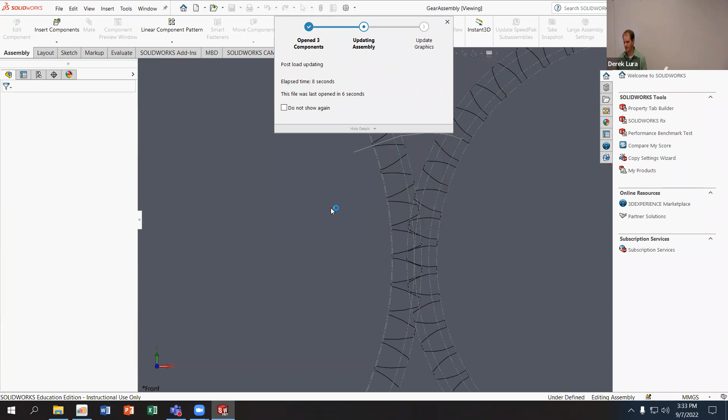Inside here, you can follow along if you want. I'm not going to be collecting this file as part of the week's progress submissions. I'm going to open the gear assembly. I made a much larger tooth profile on this one, but it's derived from a very similar set to the one we did in class earlier. The biggest difference is that this one has a much larger dedendum, a larger pitch, and the base circle is appropriate for both of these gear sets.

I probably need to rebuild this to size it appropriately, so I'm just going to hit rebuild at the top of the screen. You can see these are the contact circles, and they're touching there. Right now I have a gear mate based off the size of the contact circles, and since we're rounding on this one, it doesn't work out exactly right, but you can see the gears are moving reasonably well.

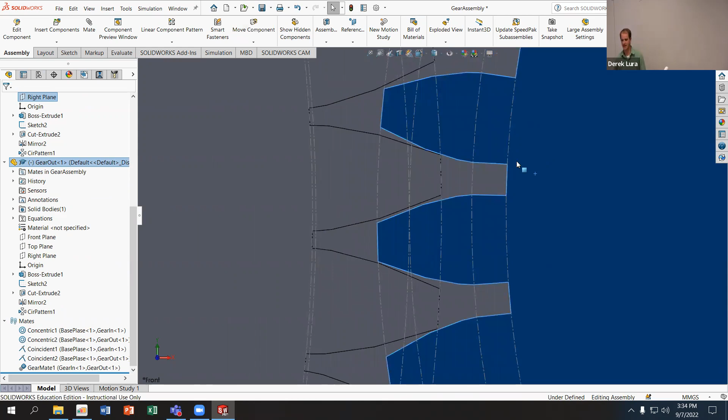What I want to show you here is that I can actually have SOLIDWORKS calculate the motions based off the contacts using the move options with physical dynamics turned on inside SOLIDWORKS.

To do that, all I need to do is first make sure that I don't have any intersecting geometry inside the assembly. Generally, when starting off doing any kind of motion analysis, either using the mates or using a motion study, you want to make sure you don't have any interferences in the assembly. So that's the first thing I'm going to check.

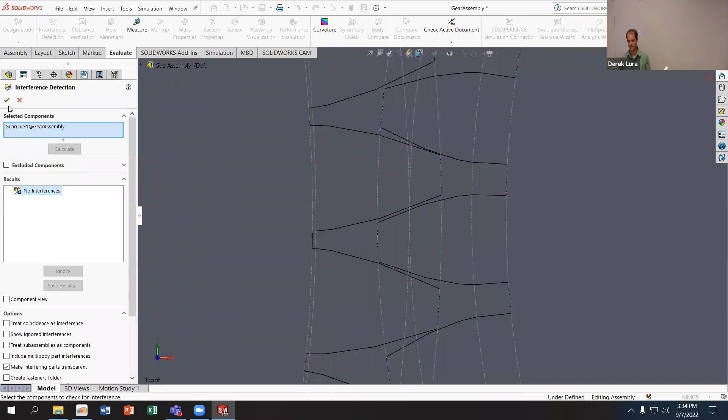I'm going to go into evaluate, interference detection, click calculate - no interferences, then I'm good. I can make this have some interferences if I drag this down so the gears are not meshing, and check for interferences.

It will show you where the interferences are and how big they are. But if you have any interferences in your assembly, then most of the things we're going to talk about today will not work. I'm going to pause for a few seconds to see if any of you have questions on the interference thing.

They can fit perfectly, so you don't have to have clearances per se - you just can't have any overlapping geometries. I'm going to roll this back so my gears are not interfering with each other, then do the interference detection one more time just to make sure I got no interferences.

Then what I'm going to do is actually turn off this gear mate, so I'm going to suppress it. Now the gears will move independent of each other.

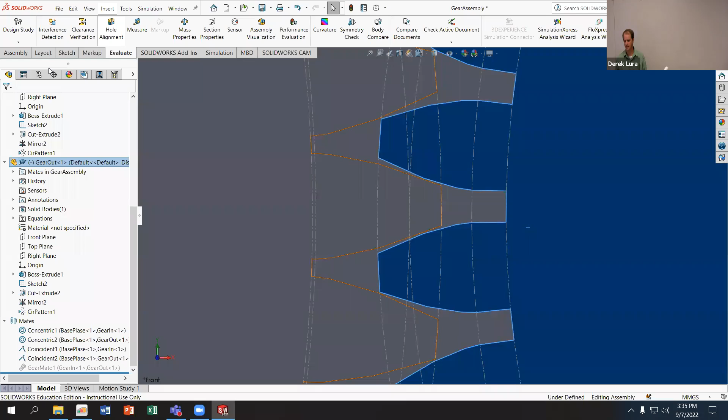What I can do is go into my assembly options, and rather than just dragging with the mouse, I click on this move component option. Then on the left here you see these options for standard drag, collision detection, and physical dynamics.

If you want parts to move as a result of a collision, then you want to turn on this physical dynamics. So if I turn this on and then drag the gear, you'll notice the other gear moves as a result of the collision.

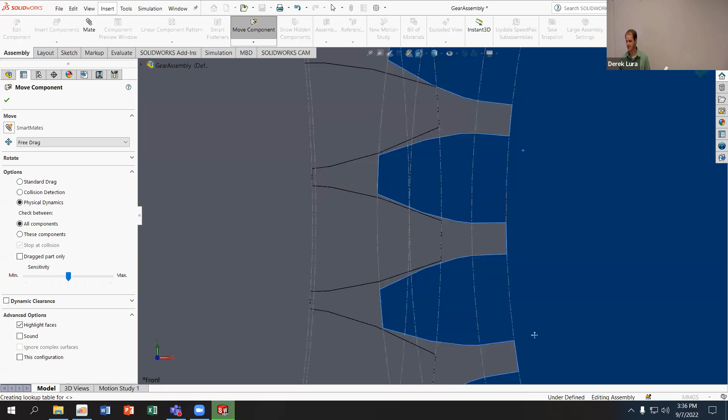I can actually use this to see the contact point shift over time on my gear set. You can kind of see the contact roll along this. Now this looks like a series of segments on the display just because of the way it's rendering the curve - it's not showing the fully rendered curve profile as driven by the equations in the gear. When it tries to render a circle, it doesn't actually render a circle, it renders a series of lines. So it doesn't line up exactly perfect here, but you can kind of see the transitions as it goes across. I'm always catching a new tooth at the top and then releasing the last tooth at the bottom.

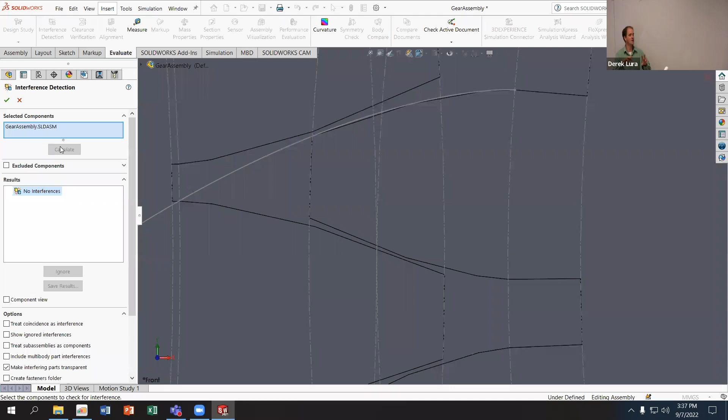It doesn't matter what I do here as I roll it around - if I ever come back into evaluate and do interference detection, I'm going to get no interferences. Because what it's doing is looking for whenever there's an overlap, and if there's an overlap, it pushes that next component out of the way in whatever direction it's allowed to rotate. You get the same options in the rotate options.

So if I go to move, rotate - I'll wait for SOLIDWORKS to respond.

Hopefully it's not crashed. But it's the same exact components that we have here. We can go to physical dynamics and we can rotate. Oh, I must have accidentally moved it while I was calculating or something.

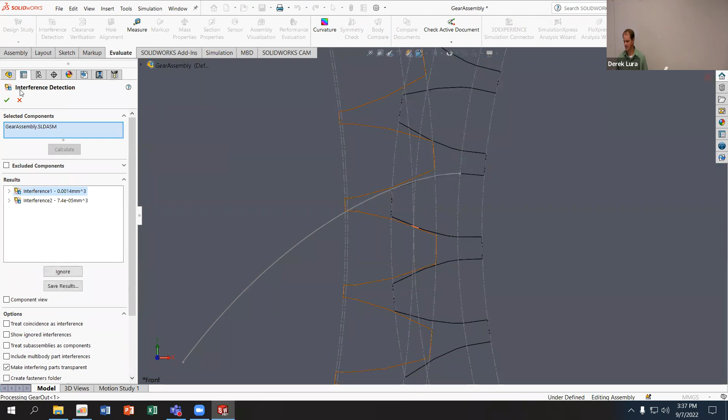Let me evaluate interference detection. I must have just accidentally clicked it while it was frozen. Should I adjust it a little bit? No, so close. I don't have a whole lot of clearance in here. No, look at that bad position.

I'm not going to do this one more time. You guys already saw it work. All right, I got it to work. I moved my gears, they're not on the right spot anymore, but you get the idea.

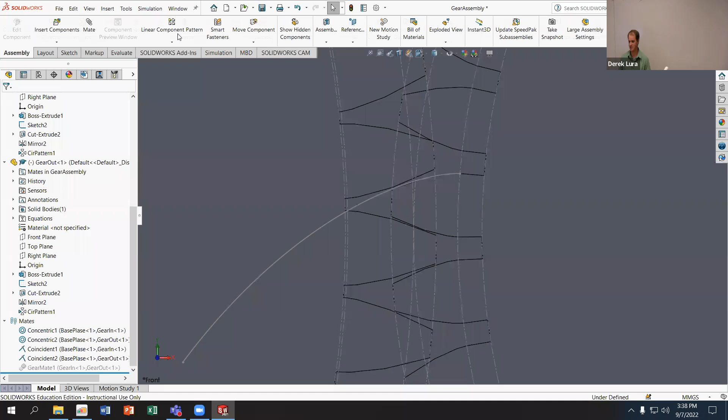As long as I'm able to set up the assembly so that I'm not starting in an overlapping condition, and I have things that will move appropriately based off collisions between objects, you don't have to specify the mates. You just have to go into the move options here and specify you want the specific type of collision. You can also look at the conventional collision detection. This is helpful for figuring out where the limits of things are.

So I can drag things around and it'll stop when it hits a collision, if I can get it to start in a non-colliding state. See if I get... oh, I've got to turn my collision on.

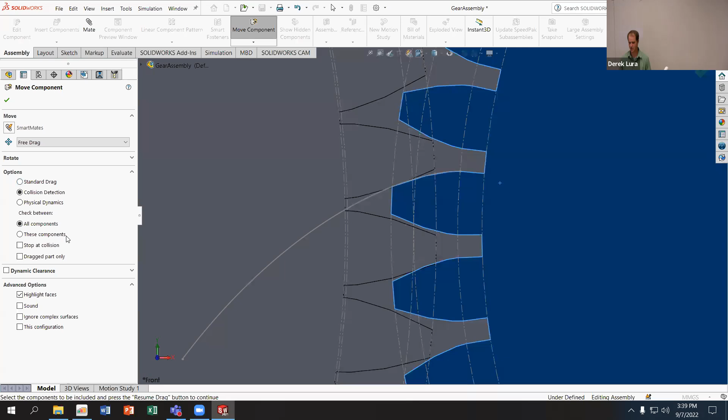It's ignoring these ones because it's already collided with those faces. So you can see all the faces that are lighting up -- those are the ones that it's colliding with. There we go, now I'm not colliding.

Stop at collision and make a sound. Bonk. And one of the things that's interesting there is you'll note that it actually collided on these faces at the same time, because this gear is really set up as an involute gear, and so it's able to maintain contact across multiple teeth at the same time, which is good.

There is kind of a boundary on this in terms of what amount of overlap is considered to be a collision versus not a collision, which you can adjust on these sliders -- that's the sensitivity setting. I wouldn't adjust that too much. If you make it too far towards max or too far towards min, either it takes a really long time for it to run, or it starts ignoring things. But you can adjust it in small amounts if you find you need a little bit tighter control on your sizes, or it's being too sensitive and not letting you do what you need.

And you can also isolate and only look for collisions on parts that you're touching, as opposed to all the parts, if you want to look at downstream or not-downstream effects.

Any questions on doing the collision detection or the physical dynamics using the move options in an assembly? I hear a ding, which is good -- you guys are playing with the collision detection.

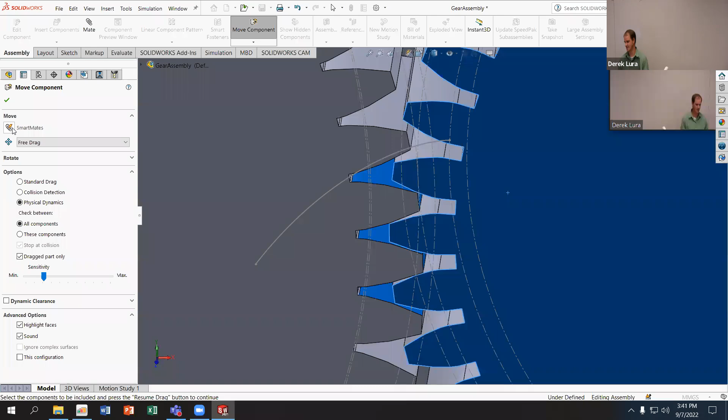Right, next thing we're going to do is build out an assembly. I want to show you some assembly features you may or may not have seen in the past. And then I'll show you how we can actually move a fairly complicated set of parts in very specific ways using just mates. After that, we'll look at doing some motion analysis -- hopefully we'll have time to do that in some level of detail.

So go ahead and close out the gear assembly if you haven't already done that. I don't need to save it. I'm going to do a new assembly. I'm actually going to work in inch pound second, but I do want to work from my base.

These are all from the robot.zip file on Canvas. So I'm going to open my base, click on the green check mark, and change this from MMGS to IPS. I'm just going to flip it so it's not upside down.

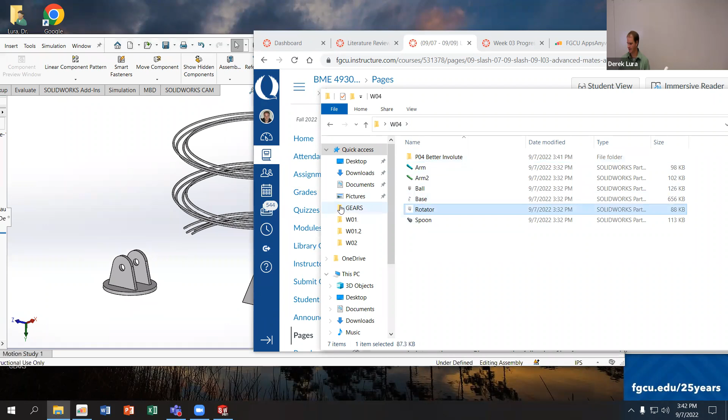Yeah, I made it inch pound second -- I made all the robot parts in inch pound second. Once I've got that first part in, I'm just going to drag in the rest of my parts. So I'm going to go into the uncompressed folder here for week 4, and I'm just going to drag in the rotator, arm 2, spoon, and ball.

Those are all my parts. So once I've got that, I'll minimize that and maximize my screen.

The first mate I'm going to use is actually a hinge mate. The hinge mate is just like using a concentric and a coincident mate, except it combines them into one utility, which can make your model tree more concise.

So if you go into mate... actually, does someone need a few more seconds to get these parts loaded in?

So what we're gonna do is build out a little robot arm here. It's only got a few components. It's gonna have a set of degrees of freedom, and we'll have the robot move along the path I've specified inside this base after we have it. And if we have time, we'll also have it go and drop a ball onto this rolling track, pick it up off the bottom, bring it back up and drop it. I don't know if we'll get all the way through that, but hopefully we'll get most of the way through it.

So far, so good. Who still needs time to get the robot parts loaded into an assembly? One, two. Anyone have any questions while we're waiting for them to get stuff loaded? Marza?

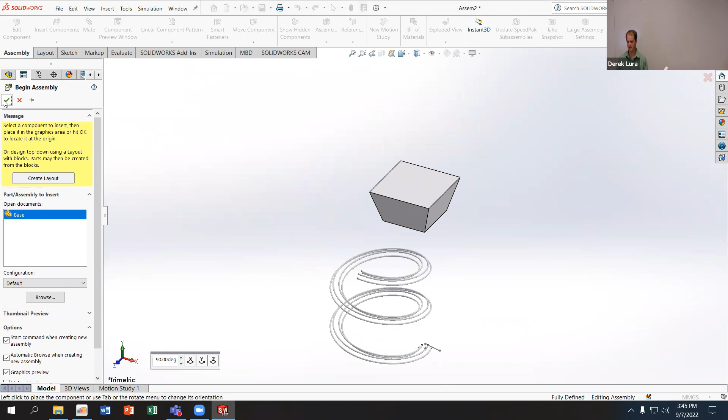Let's start over. I'm just going into a new assembly. For the first part in the assembly, I want to click on the base, click open. I don't want to click on the workspace because I really just want to make sure that thing starts off with the origins aligned.

Most of the time, if you're working on a CSWA or CSWP style question, you're going to want to have some base component or starting component that has the front right top planes of the assembly align with the front right top planes of the part, and that will do that.

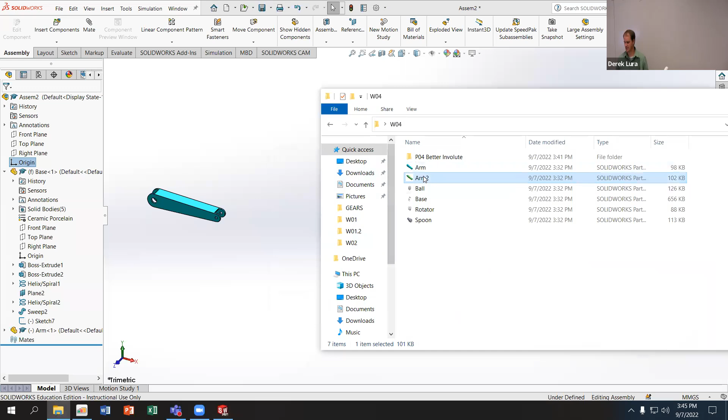And then the rest of them, since I'm going to position them using mates, I don't really care where they are, so I'm just going to drag them in. You can drag in multiple parts at the same time, so I can drag in all four of those at once. I don't typically do that because sometimes that makes SOLIDWORKS crash, and I'm just being conservative.

All right, now I'm going to start adding my mates to position these. Again, I'm going to start with my hinge mate, which you may or may not have used. Most of the mates in SOLIDWORKS, if you read what it's asking for, you can figure out what you need to do to make that mate.

So I want a hinge, which is in my mechanical mates. You see it's right here, it says hinge. So I'm in the mate tool, in mechanical, click on hinge.

It says, what are the concentric selections? So I want this hole to be concentric with this hole. What are the coincident selections? I want the bottom of the rotator to be coincident with the top of my base.

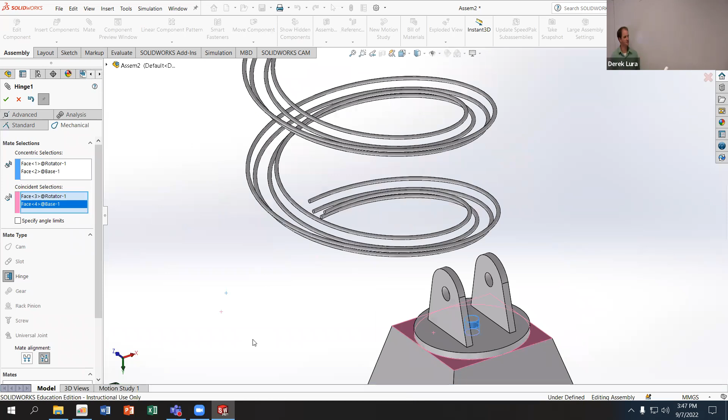Again, pretty simple set of mates, right? I hope. And not that hard to interpret based off what I was given. The advantage there is I've added what is equivalent to a coincident mate and a concentric mate without having to go through and do an extra click. So this is really all about saving you time when making assemblies.

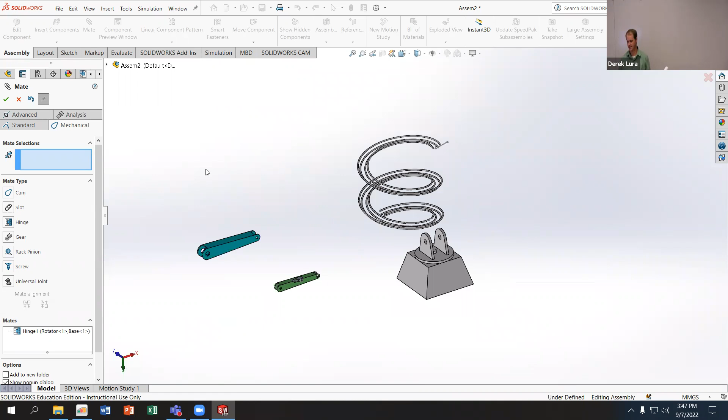Another really helpful mate is the concentric mate, which I can click on this face and this face to get the concentric mate. I'll go into my standards. Wait for SOLIDWORKS to respond.

I need a new computer for up here. Or maybe not, it slows me down - makes it easy for you guys to keep up.

And then click on concentric. I want you guys to also realize that I can click on the faces and then the mate, or I can click on the mate and then the faces. The order is up to me. Most of the time, if you know what kind of mate you want to add, it will restrict your selections based off of what you click. So a lot of times it's good to click the mate first.

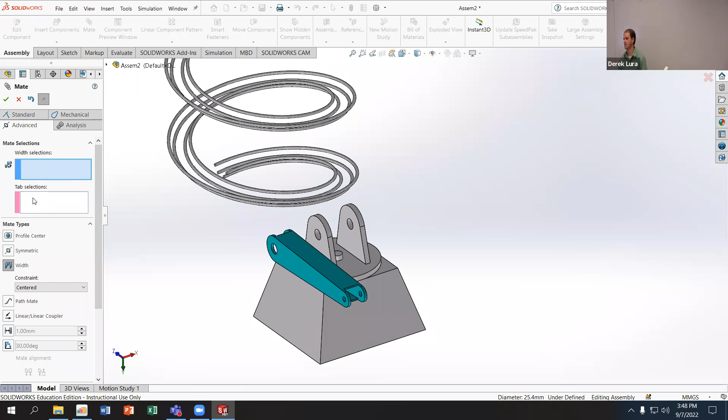Another mate that I like to use a lot is the width mate. This prompts me to click the width selections and the tab selections, and right now it doesn't matter which one is which. So if I click on these two surfaces as my width and these two surfaces as my tab, it's going to center that part. If I flop those and select these two surfaces as my width and these two surfaces as my tab, it does the exact same thing.

So don't worry about which one is the tab and which one is the width. Two sides of one object, two sides of another object gives you what you need.

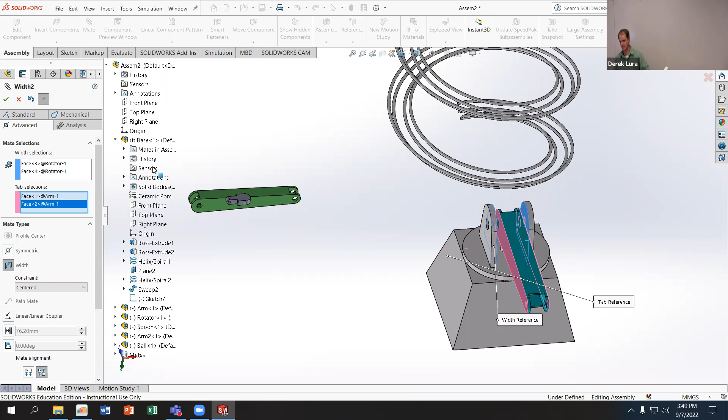So again, I'm going to go into advanced mates. In the mates tool under the advanced tab is the third one down. Also remember, if you guys don't remember where something is, go into your commands.

Oh, it doesn't come up. Well, I can always search, so go to my help. There's a width mate right there. Again, the help options are very useful in understanding some of the limitations of the different parts as well. One of the things we're going to see here in a minute is a limitation of the width mate - I think it will not work inside of our motion analysis.

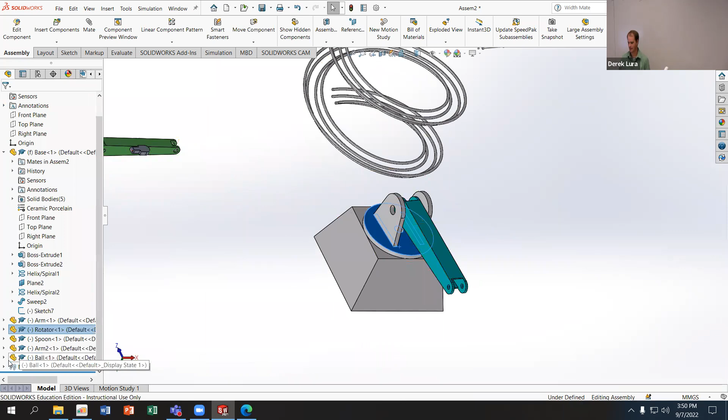So, yeah, Marza. The hinge? Yeah. What about it? Which one of the mechanical did you use? So the first one I did was the hinge mate. Inside the hinge mate, I have two concentric selections, the two circles that I want to line up with each other, and then two coincident surfaces, the two flat surfaces that kind of abut each other to make the hinge.

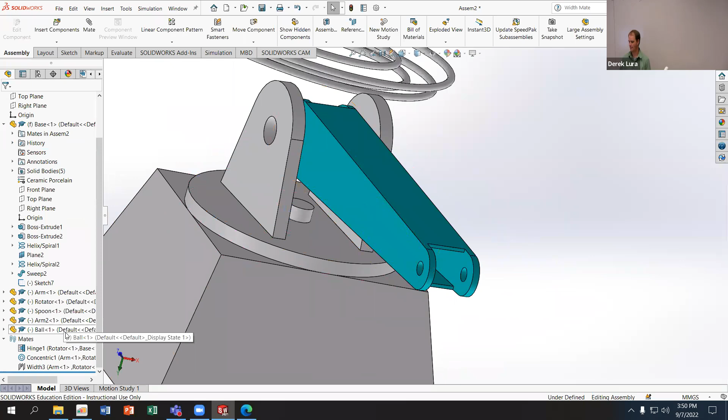Next one, what next one? I think you did another one for the... I did a concentric to make the center axis so it rotates around, which is this concentric mate right here. And then I did the width to hold it in position. That keeps that gap constant on both sides, and that'll adjust - if I change the size of one of these parts to fit that gap, it will still stay in the middle, right? And right now it's not checking for interferences or anything, so this goes wherever it needs to go.

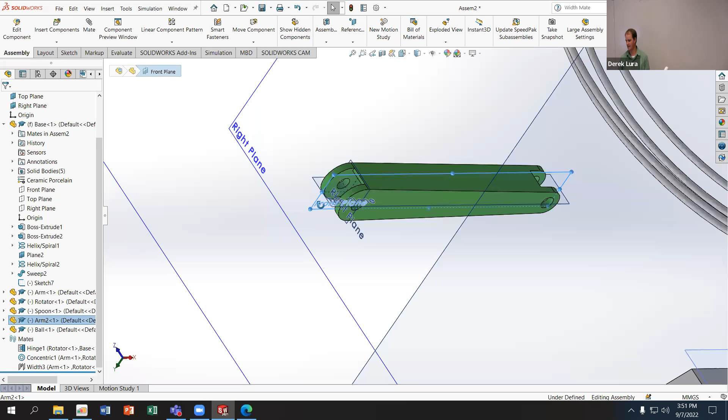If you're smart about how you make your parts, you can get the same kind of constraints without having to use these fancy tools. So in both of these parts, I'm going to turn on my reference plane view, going into my little eye here and turning on the primary planes. You can see that I have a front plane going through the middle of the arm.

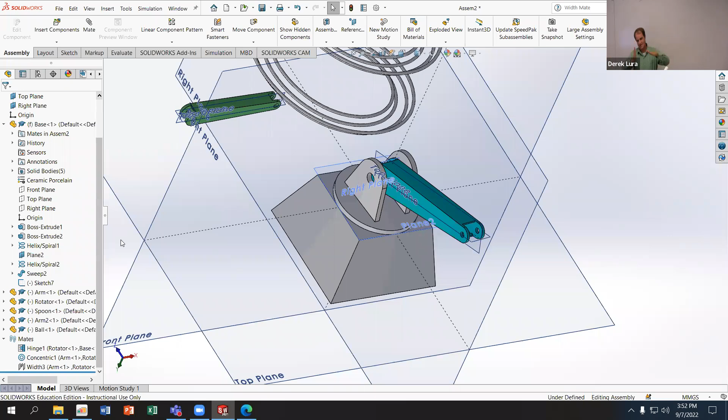And then on this part here, arm one - let's turn on its view. I can see I also have a very similar front plane going through that arm. I can also use those for my mates. So don't discount the use of reference geometry to align your parts, especially when you're looking at angles between different faces. A lot of times having the angle between the center of a part and the center of another part is more valuable than having the side of the parts. So I'm going to show you guys what that looks like right here.

I'm going to do a mate between this base here of this arm and this base here. I'm just going to make this concentric, just so the pins line up.

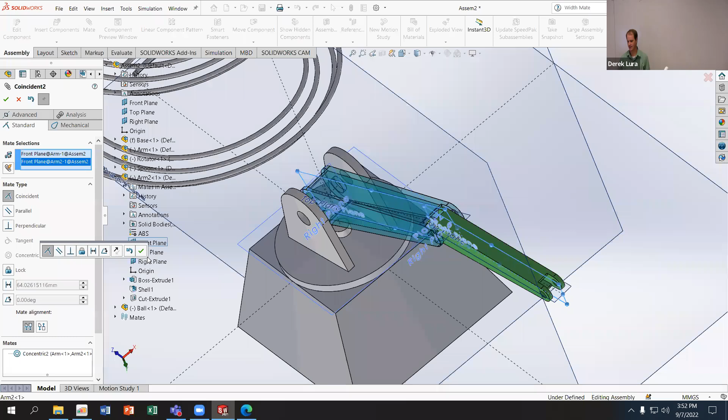But then I'm also going to use the front plane of arm 2 and the front plane of arm 1, which honestly I kind of hate selecting outside of the view space right here - I wouldn't normally do that. I'd open up a little drop down menu here, go to my arm 1, select the front plane there - makes it a lot easier to make sure I'm getting the thing that I want. And then I'd go into my arm 2 and select the front plane from there, and I can make sure I'm not accidentally clicking the wrong thing. The other advantage is I don't have to have these planes showing on my parts to do that, so I don't have as much clutter on my view display.

Oh, I didn't mean to add an extra mate there. So I can go through and turn off all these views - I don't have to see those mates, those reference planes all the time.

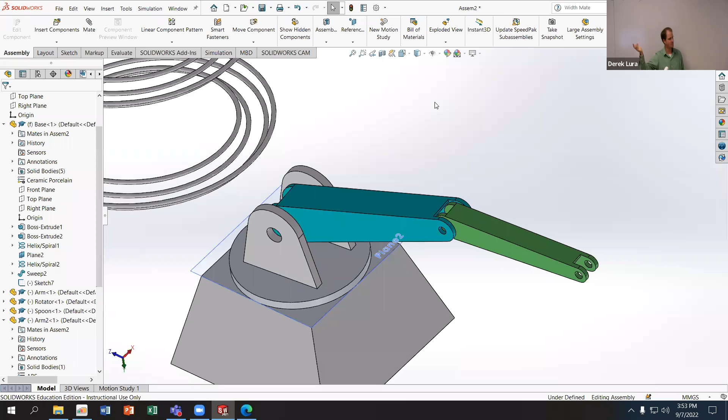The questions on adding mates from reference planes - probably review for most of you there. The what mate? Yeah, sure. I'm just going to suppress this one. Again, I can use the width mate here as well, right?

So I can go into mates and into my advanced, click on width. I'm just taking 2 sides of one object and 2 sides of another object. It doesn't even need to be the inside sides, right? I can do the outside to the outside - there we go, outside. Same thing, because it just makes them equally spaced. Now that wouldn't work if I had one side that was much thicker than the other side, right? But as long as it's symmetric, it's fine.

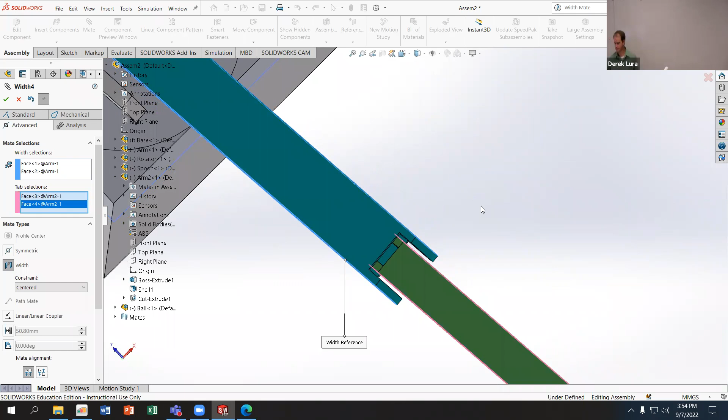You were doing the... I made the planes coincident. Yeah, which if I just click on the 2 planes, that's going to be the default.

Funness, right? So far, so good? All right.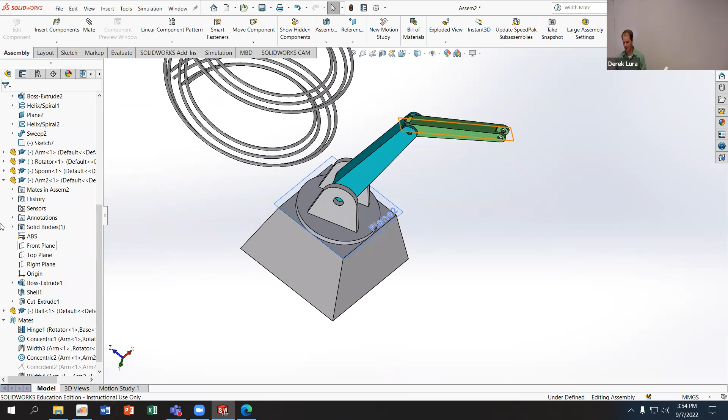I'm going to add another mate so I can position my spoon here. On this one, I'll pay more attention to how I set it up, because there's a cup on one side of the spoon and not the other. So I'm going to set the orientation of the spoon first. I want to make sure the cup side is up, so I'll mate the top of the cup with the top plane of my assembly, and make sure that's facing up.

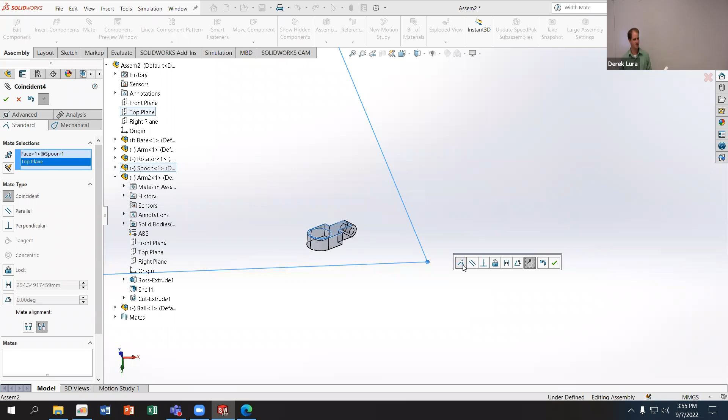Keep in mind with all these mates, I can flip them however I want, and I don't have to take the default. The default is coincident, but I don't actually want that. I just want it to always face up. Parallel is the same as coincident, except it allows for whatever distance I want. If I wanted to, I could also specify a certain distance off the ground, but in this case I just want it to always stay facing up.

So in this case, I have the cup side facing up all the time. Now wherever I put this, I can drag it all around the place and it's always going to face upwards.

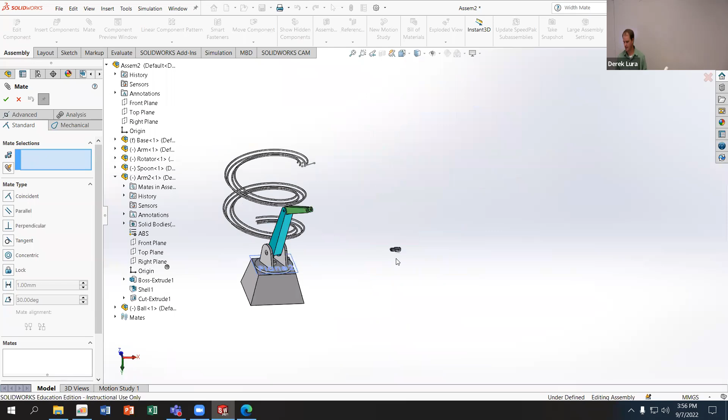Yeah, I can do it again. I would be glad to do it again. Did I actually get it undone? Yeah. So I'm just going to click on the top of the cup, the top of the flat face here, not the actual bowl part.

And then I'm going to use my top plane. I could also use any of these flat surfaces on my base, since they're all parallel with the top plane, so it doesn't really matter. But I'll use parallel with the top plane. Then I'll look at it and make sure that if it's facing down, I just flip it. So there it is facing down, facing up.

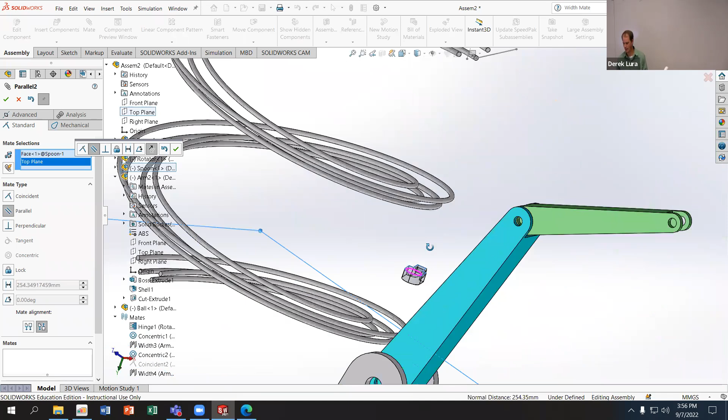I'm using the middle mouse button to rotate my view, to kind of look around, and using the mouse wheel to zoom out. Scrolling up zooms out, and scrolling down zooms in. Then I click the green check mark to accept that mate once I have it in place.

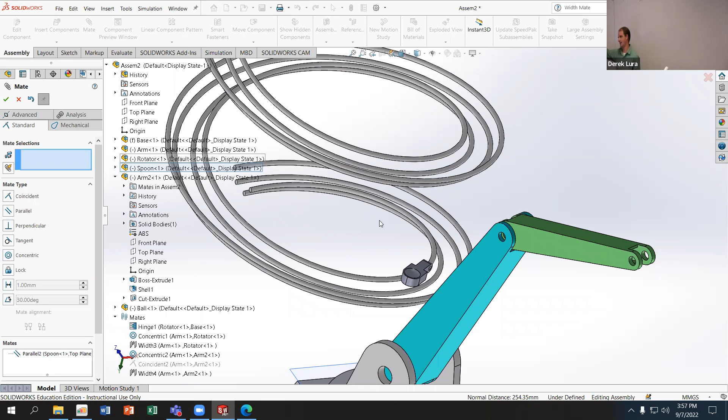Keep in mind the mate tool stays open because it assumes that when you're adding mates, you probably want to add more. So once you're done, click either the X or the green check. The only difference between those two is that if you have a partially selected one, the green check will accept it, while the X will reject it. It doesn't really matter if you already have all the ones you want set up.

I also want to make this hole on my spoon concentric with this hole on my arm. I'm going to use the central plane for my spoon, just to show you that one more time as well. So I'll use the front plane on my spoon, and make that coincident with the front plane on arm 2.

A lot of times, if you have the option of using basic mates as opposed to advanced mates, the advanced mates have a higher probability of over-constraining the assembly than the simple mates. So if you have the choice between a simple mate or an advanced mate, most of the time you probably want to pick the simple, basic ones. But you may say, look, I don't know how to position this so it's the same on both sides. Then you want to use one of the advanced options, symmetric or width. By the way, symmetric and width are the same, except with symmetric you have a central plane you're making things symmetric about, whereas with width, you have a gap you're trying to keep symmetric about.

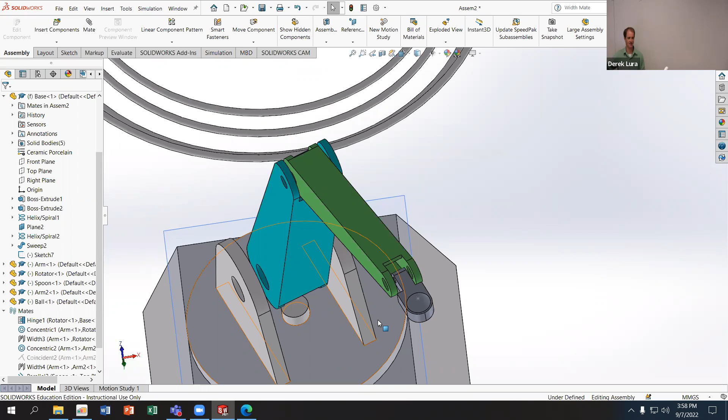Look good? Got a nice little robot arm here. Whee!

If I want this robot to follow a specific path, I can specify the path that I want it to follow, and then add a mate on that path. It's called a path mate, which is one of our advanced mates.

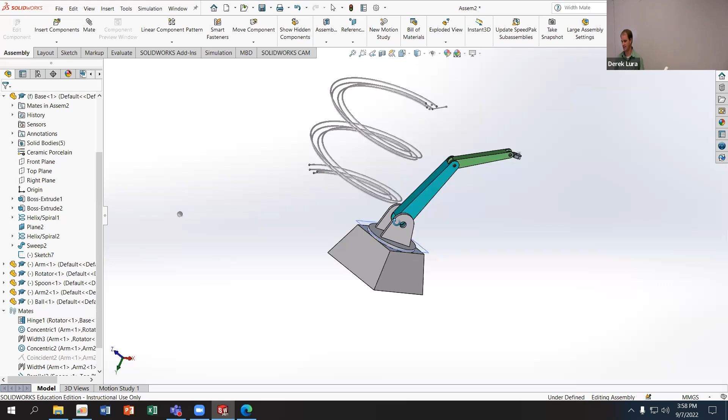I have a path built into this, and I'm going to make my ball coincident or concentric with the cup on the spoon. I also have a point here at the middle of the hole on the spoon, just as a reference, so I can keep that on the path. It helps to set up the path mate.

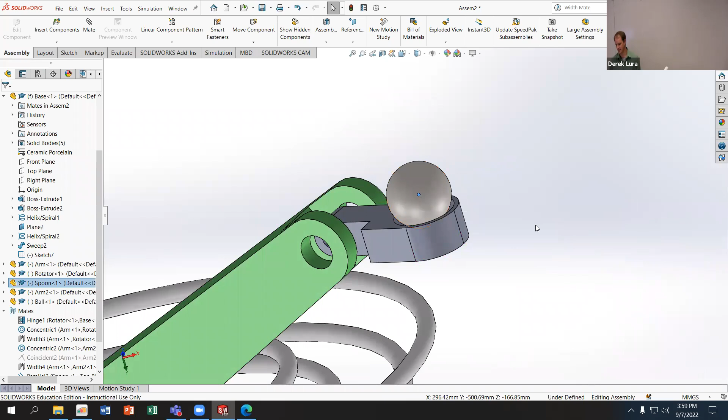Right now I can't see my path because I don't have the options showing that spline. So I'm going to turn on the view to view curves on my base. If I click on base, which I can do in the workspace or in the model tree, click on my view options, turn curves on. You can see how I can toggle that on and off.

Turn that on. Then what I want to do is make my robot follow the path of this curve with the ball, really with the spoon, but it's at the center of the ball as well, since they have a common center.

I'm going to do that a little bit slower. I want to make sure everyone has that path shown before I move on. All good? All right, so I'm going to go back into mates.

Oh, nope, not insert component. Wrong button. Back into mates. Go to my advanced, and I'm going to click on path mate.

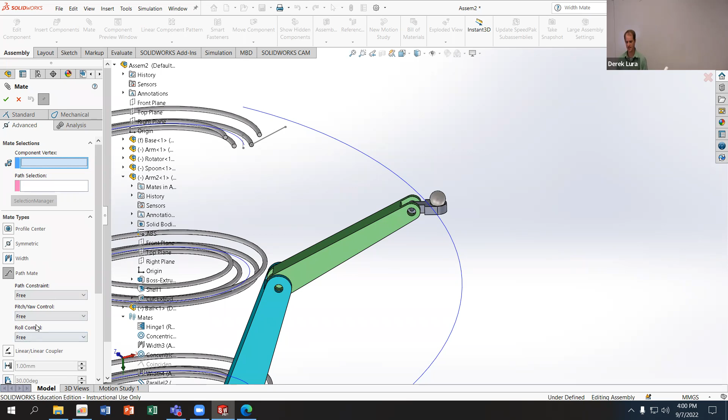I'm going to start with free, and then I'll show you what some of the other constraints allow me to do. For the path constraint, use free, all good. The component vertex is the point at the top, the center of the ball above the spoon. The path selection is the curve, which is actually in the base part, so edge at base-1.

I'm going to leave these as the default for now. We're going to come back into this in a minute. So I'm going to accept that.

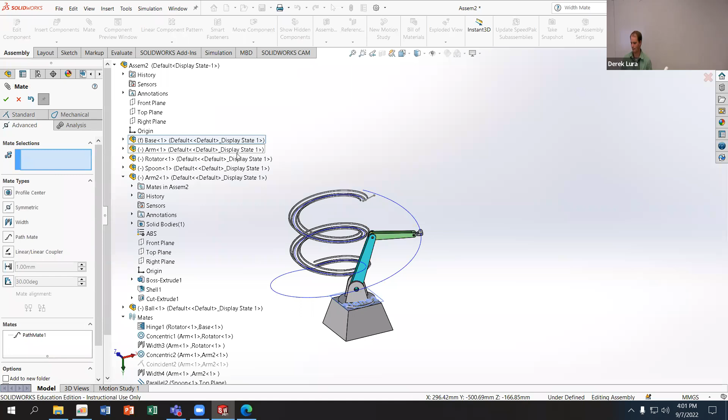Now what you should be able to see is that I can actually move my robot around and it will follow that path. So when I talk about making a series of mates that accomplish complex movements, that's kind of what I'm talking about. Notice here that it wants to kind of elbow down and get weird because it's trying to solve the inverse kinematics, and it's hard for it to interpret what I want.

If I click this from the top, it's a little bit easier for it to tell which way I'm trying to get it to rotate. Fun, right? Yeah, the center of the ball is the point the path is following.

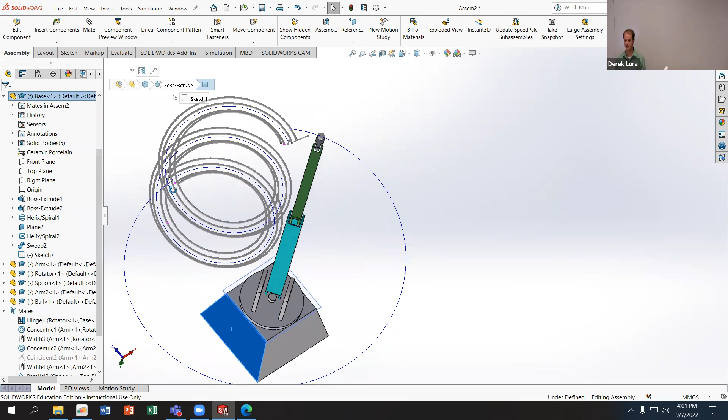So to get the curve to show, click on the base. The curve is actually in the base part. Then on the little eyeball, there's the option to show or hide curves. If you toggle that, it should show up. Again, it's in the base, so make sure you have the base selected when you toggle that button. Just like we did for the reference planes, it will show or hide those for the individual parts if you have a part selected.

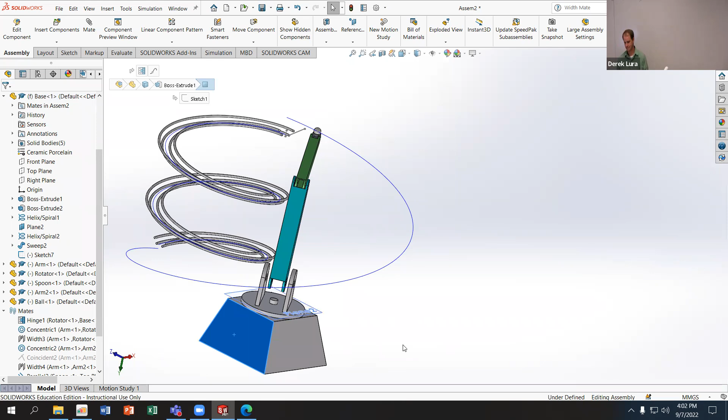That solve it for you, Eduardo? Or... All right, Pedro. Everyone got that working? Yeah.

Another nice thing about this, if you want to use it for analysis, is I can explicitly specify how far along that path, or what percentage of the distance along that path, that I want it to have. So I can go into my path mate.

I'm just going to right click on it and do edit feature, and I can change this from free to either distance or percentage. I like percentage better because I don't know how long that spiral is, so I'm going to do percentage along path.

It starts at whatever the start of the curve is, and you can see I can tick this up and it moves it along that path. So I can put it wherever I want from 0 to 100%. I don't know why this one specifically, it doesn't actually go to 100%, it stops a little bit shy. And I found that if I do 99.9%, it actually goes further.

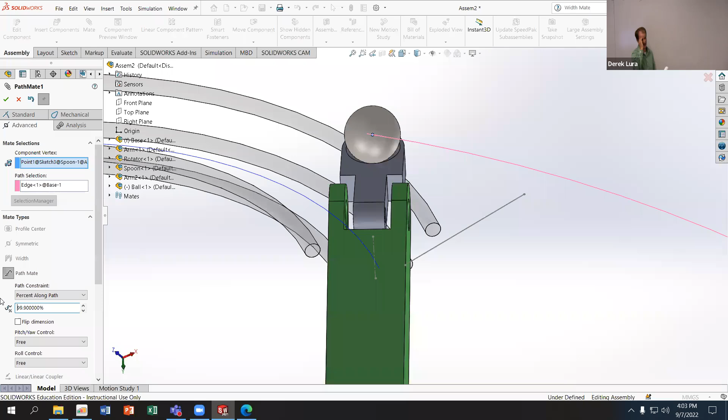I think it's a rounding error because it's calculating how long that path is and then translating the percentage into a distance, and it's just making a rounding difference. So I don't know why it does that, but it's kind of weird about that. It works though.

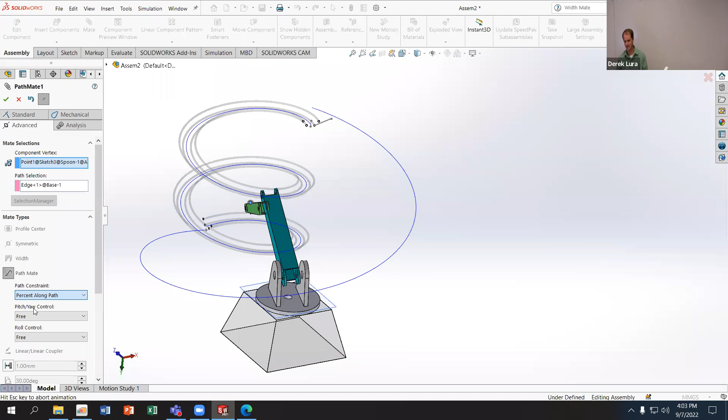So this is inside editing the path mate. If I right click on path mate and then do edit feature, I can change this from free to percent along path, then I can specify how far along the curve I want that to go.

We're using the mates to drive the assembly in complex ways, which we can use to analyze the parts, or just for fun. But if I had a robot and I wanted it to move along a certain path, then I could use that.

We can also use the analysis tool to look at different mates and get outputs here. Another convenient way of getting outputs is I can actually use my sketches in the assembly to look at angles between parts.

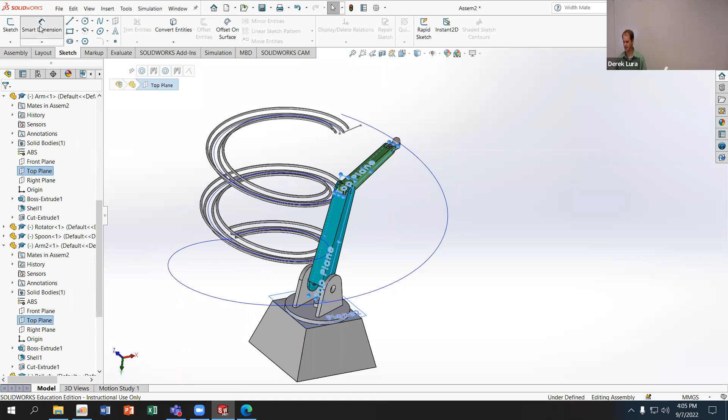If I look at the angle between arm 1 and arm 2, I'm going to look at the top plane of arm 1 and the top plane of arm 2, and then click on Smart Dimension. I can place the dimension between those planes. I didn't move it - it didn't give me the one I wanted.

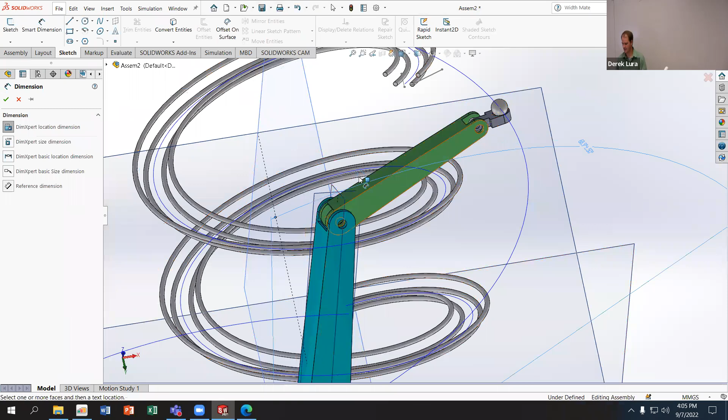I'm gonna exit that and do Smart Dimension again. I'm gonna show my reference planes. I gotta click on each of these. Let's do Smart Dimension and then go here - my arm 1 top plane, my arm 2 top plane. I should be able to click to place it. Why is it putting it over there though? I don't like that.

I'm gonna be lazy and turn off the views here. I'll just get the angle between the 2 top surfaces, so I'll do Smart Dimension from this surface to this surface. I want you to give me the dimension right here. That's how it works.

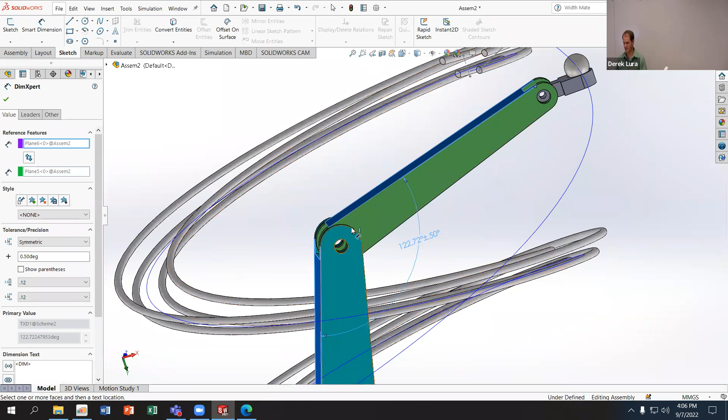Oh, I get that angle there. I can do the math to figure out what this angle here is. Usually it lets you click where you want the angle to be, then that allows you to specify if you want the obtuse or the acute angle, like this. So it should be letting me pick which side I want the angle on, so I know which one I get.

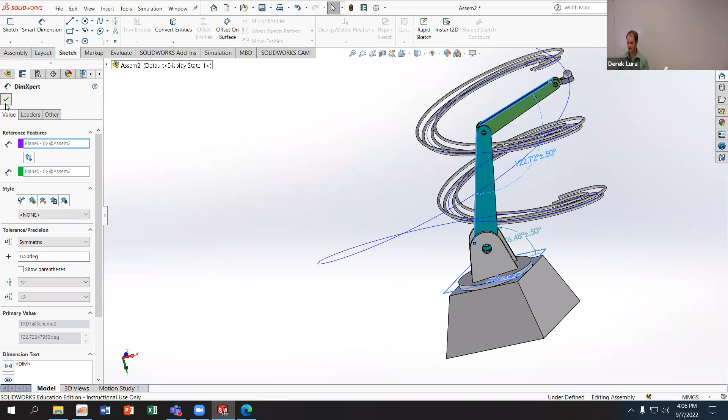Now those dimensions that I have here using the Smart Dimension tool, I can't use those to define the angle of the arm - that is purely an output. But as I move this along, it will recalculate and give me whatever that angle is. So if I wanted to figure out the range of angles I needed to get the sizes I want, I could do that. It's not displaying them very intuitively because of how I have them pushed, but you can see that as I move around, the angles are updating.

Yours is like going off the screen or something.

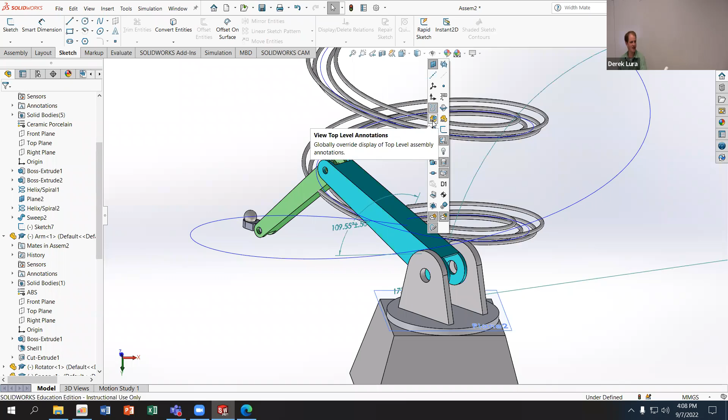It could be the view options that you have - maybe you have it set to not display dimensions. One of these options should be dimensions. I think it's this one here, sketch dimensions. Maybe under annotations for DimXpert, view sketches. Oh, I tried turning my annotations off and it froze. Did I try this box right here? It's labeled as top level annotations - is that on for you? It's a little assembly box with ABC on it.

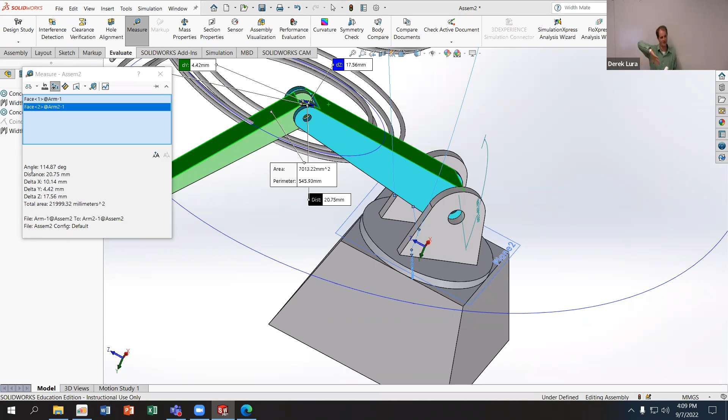I'm not a big fan of these, but they do work. The problem is they just don't tend to render in convenient places, which I don't really like. You can also just use the evaluate tool and measure the distances - the disadvantage is it doesn't stay on the screen. So there's the angle there. It doesn't really like doing this a whole bunch because it wants to put the dimensions in a specific plane based off where you click it, and then when you rotate it around, it's like, where do I put the dimension now? It gets confused, but it does give you the right values - it's just that where it's being shown is oftentimes somewhat unintuitive.

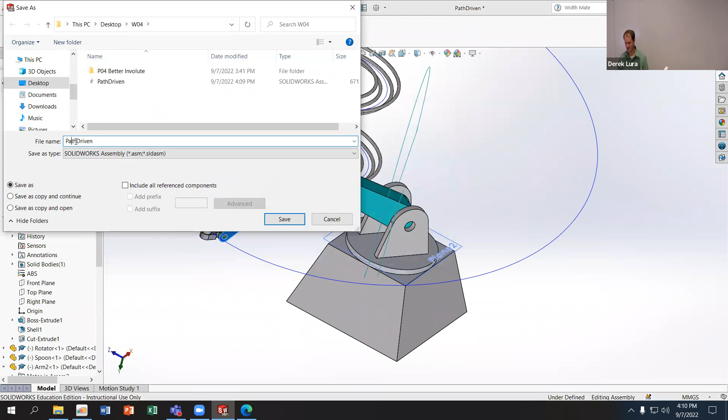And now whatever I change on this one, I don't have to worry about it messing up my first one, which was moving the way I wanted, where when I moved the arm, it rotated around. Does that sound okay to everybody? Okay, yeah, sounds good to me.

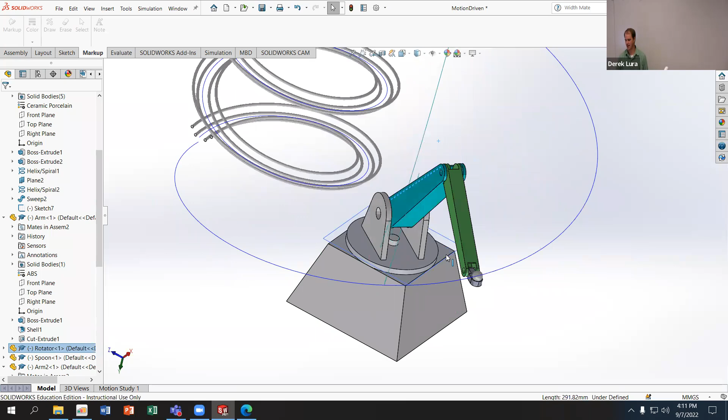You guys may also note that this arm occasionally flips down past where I want it to be, especially if I try to drag it from the arm itself. If you want to, you can restrict that by adding a limit mate.

So I'm going to go into assembly mates just to show you where this is. You don't need to follow along with that. In advanced here, you have these ranges - there's a distance range and an angle range.

If I click on that one, I can click on this surface and this surface, and I can say, hey, I want that angle to be no less than, let's say, -10 degrees and no more than 89 degrees.

Try flipping the alignment. If it's saying that limit is going to break another mate, then chances are I have the alignment backwards. Okay, that one worked, so now it shouldn't allow it to totally flip.

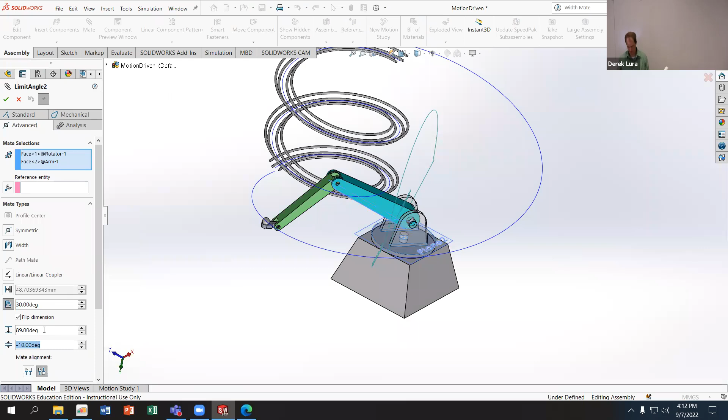Although I may have overdefined the assembly. It looks like I overdefined it. Oh, I put the minimum in the wrong spot. No, that should be the minimum.

You know what, let me turn off my path mate. Suppress that. Now this can rotate. I'm going to add a limit mate.

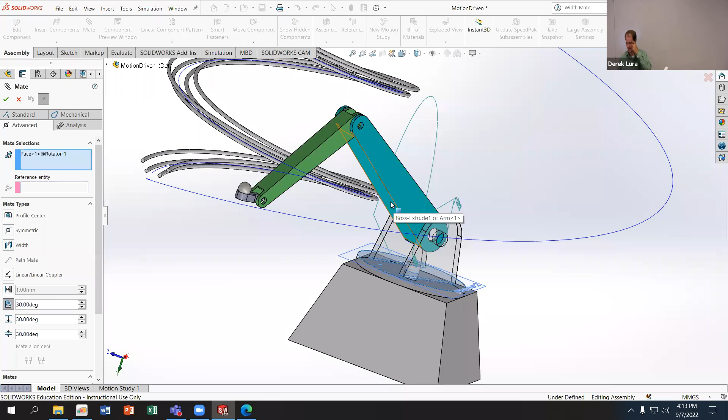That could be it - it could be just because that angle is set by the other configuration, so there was no reason to have a limit mate there. Let's say -10 to 80.

Yeah, I have it in the wrong direction. It's okay, I have it backed up. Let me rotate that. Giving more trouble than I thought it was worth.

Opposite faces. Okay, good, good, good. Minimum - let's just do 10 to 80. Maybe the negative is confusing it.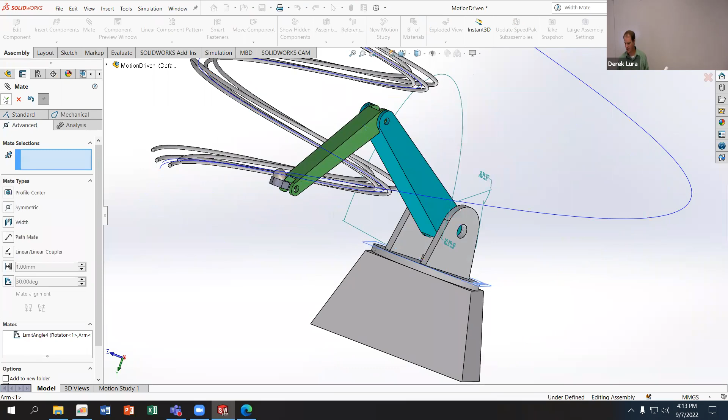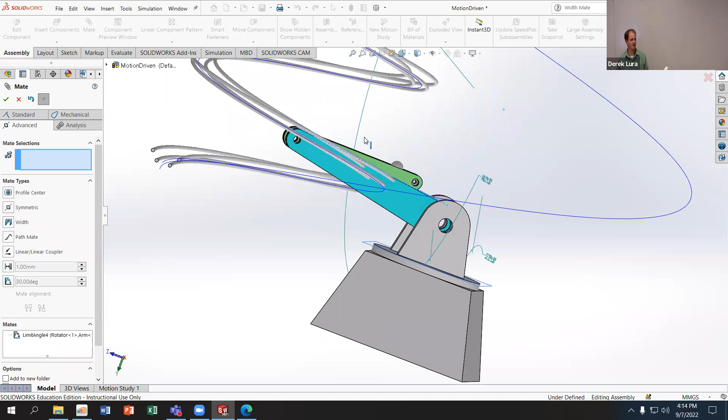There you go, so it hits a limit there. Oh, I'm getting too close to the edges - it's flopping. So there's the 10. If I pull it too far, it goes to -10, so it's flipping on those axes. But you can see it does hit a limit on the top. You gotta be careful with how you define these because they're kind of sensitive.

Anyways, don't add the limit mate, but you can add limit mates if you want to. They work reasonably well when the other positions of the assembly are not going to push past those limits too easily. So if I specify a distance dimension between 5 and 6, and the assembly doesn't break if I go from 4 to 10, then it's going to work better. If you have things that break the assembly when you go past the limits, it's not going to work as good, so you may have to add more mates, more constraint, to get that to work.

All right, so I'm back here. I don't have my angle mates, and this thing is still working fine. I'm going to turn on SOLIDWORKS Motion - go into SOLIDWORKS add-ins, turn on motion. I realize it's 9:15 or 4:15, so we're almost out of time.

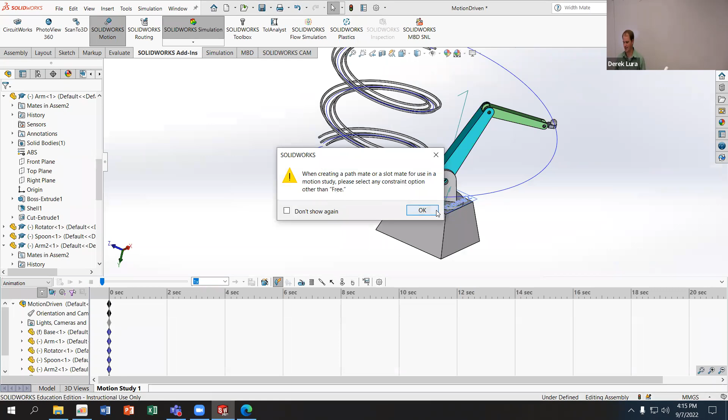Once I have that on, I can go into the motion study. It's going to complain to me about using the free mate on the path - I'm just going to ignore it. I don't think it's going to give me any errors. Yeah, so we're good. It's ignoring my coincident mate inside this arm, but I'm not sure I care about that either. It seems to be running okay, so I'm just going to leave it as is.

And one of the things we didn't cover in the design for manufacturing class, but I think is very helpful, is driving assemblies with servos. So what I can do inside the motion analysis is define motors for all of these parts.

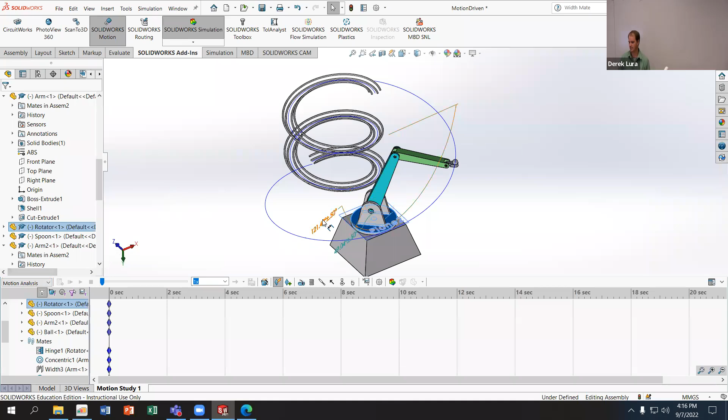And I actually want to start this at the top of the curve - that's going to be my starting position. Try to get a good orientation that I like. There we go, that's good. I'm going to update my orientation camera, just doing replace key. So that's my default orientation, so when I watch it, it'll go from there. And I'm going to add a motor.

I'm going to click on the cylindrical surface of my base. It's going to automatically default to a rotary motor because I clicked on a circular surface. And then down here, rather than running this as a constant speed, I'm going to change this down to servo.

Now, if you're doing this using the time slider on the bottom, like we did in design for manufacturing, then specifying these other options probably works better. The servo works good using the key events sequence that I'm going to show you guys in a second. So click on servo and then set this to position, or sorry, displacement.

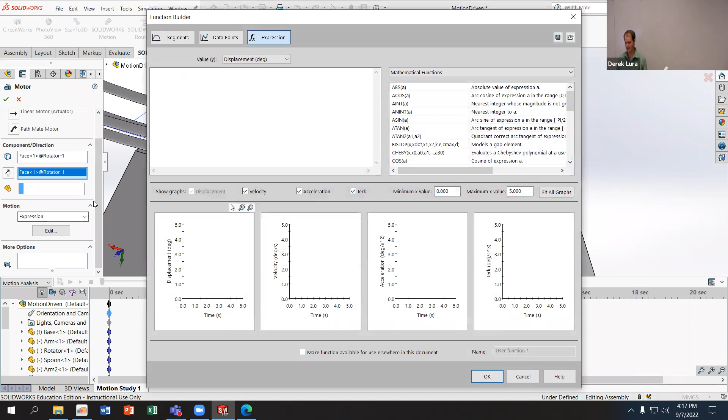Displacement, position, same thing. So I have a, cancel, I didn't want to change that. Okay, save it. I have a rotary using that face on the base of my rotator, using a servo with displacement. And click on the green check mark.

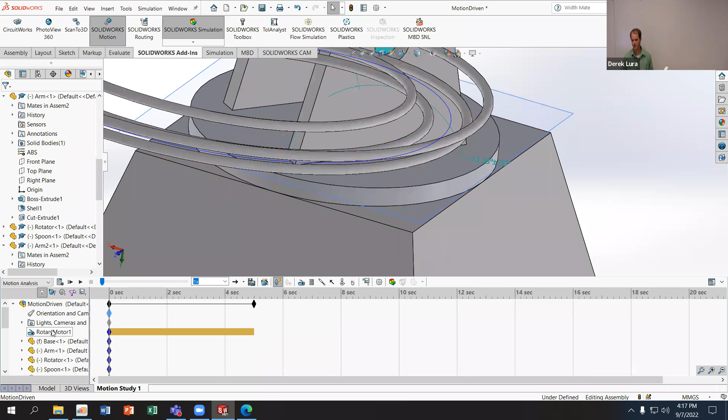And then what I want to do is, rather than controlling the movement of the motor using the positions on the slider here, I'll explicitly tell the motor how far I want it to move using event-based setups. So I'm gonna click on the event-based motion view on the right-hand side of the screen. If you don't see that, make sure you're in motion analysis. If you don't see motion analysis, make sure you have the SOLIDWORKS motion tool turned on.

Click on that. You have this option, and now instead of having a time slider, what I have is a sequence of tasks that I can set up just like an animation playing in PowerPoint or something. And then on the right, it'll show me how long it takes for that sequence to actually go through and finish. So I'm going to add a task.

And what I'm going to do is I want this task, this is called task 1. I'm going to rename it rotate base, if it'll let me. That's the name of the task. I can change these sliders to make it however I want.

The trigger here is just time. I don't want it to wait 5 seconds, I'm just going to have it start at 0. And then the thing I want it to move is my rotary motor 1. Everybody see that?

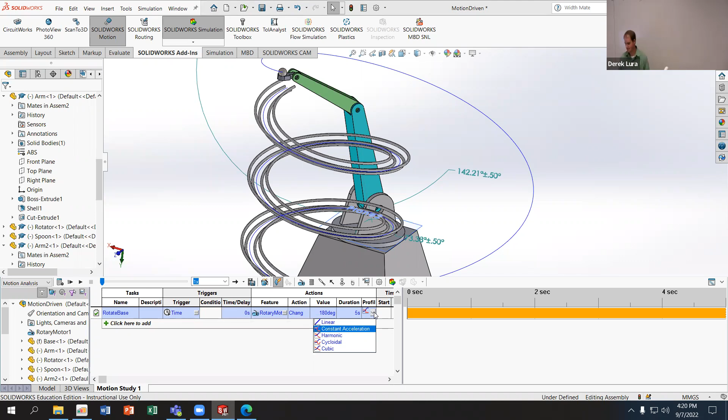And then what I'm going to do is I'm going to calculate, and we should see this thing go. Oh wait, I'm going to hide this for a second. No, I've got 5 seconds. Well, maybe I'm going the wrong way. Yeah, it needs to follow the path. If I try and go the wrong way on the path, it's not going to go.

Start 0 seconds and 5 seconds. Rotary motor, why aren't you going? I'm gonna try a smaller angle here, let's just try 10. Why are you not going? Oh no, I've just got my limit on there still. Why are you there? Bad limit.

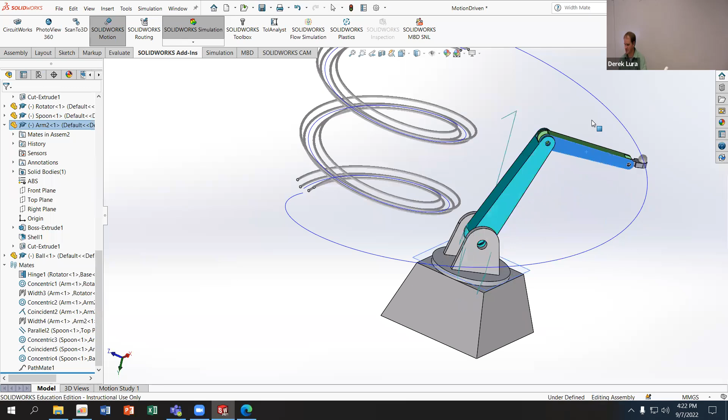Delete. Yes. I'm just gonna make sure this still moves. I set myself up for failure by not checking to make sure I had that limit moved out of the way first.

Calculate. There we go. Yeah, so it doesn't need to be negative. My problem is I still had that limit on there. So I'll do negative 180, calculate again. You see it slowly speeds up.

My mates are all messed up because I had that limit mate. And so when I brought it in here, it suppressed my other mates, and so now it's not holding those. But you can see it's trying to move through the path, it's just falling apart instead of keeping it together.

We are out of time. I'll probably make a video showing how to use these. It's not terribly difficult. Really what you do is you add motors for every motion you want to occur, and then you add tasks for every movement you want to do.

The tasks can be based off of time. They can be based off of other tasks. So you can do after the previous task, or after the previous task with a delay. And you can also make them be based off events.

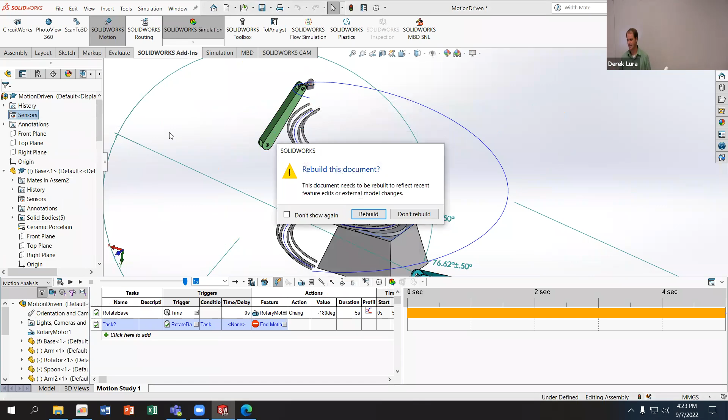So you can define events using sensors inside here. And most of the time the sensors are going to be like a certain distance, right? So proximity - when a ball gets to a certain position, or when an actuator gets to a certain position, you stop or move or do something else, okay?

Again, if you want to use those or any of those for your mini project, you can let me know, we can work through them. I'll make a little video, I'll get this thing working properly, then I'll describe all the different steps I used to make it drop the ball and move it around. Sound good?

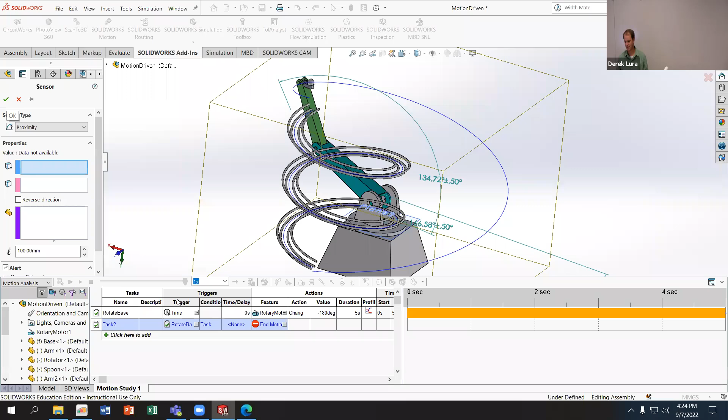What's that? For this one here? So for the rotary motor, all I did was click on the motor tool and then clicked on the cylindrical face of my - it's called a rotator, that's the first part. And it automatically selects your rotary motor as the type based off the selection.

Oh, constant speed, servo. So whenever you're going to drive things from the task list, you want to use the servo type, because it'll let you specify inside the task what the speed is. All these other ones are going to specify the motion as part of the motor, right? So if you want to decouple the movement and the object, you want to use servo, right?

So if you have a motor that generated, say, 10 horsepower, and you just wanted to generate 10 horsepower, you could choose the task and say turn it on, turn it off. You just wouldn't be able to specify what its position was, right? You can also change this to velocity or acceleration if you want it to do something like that.

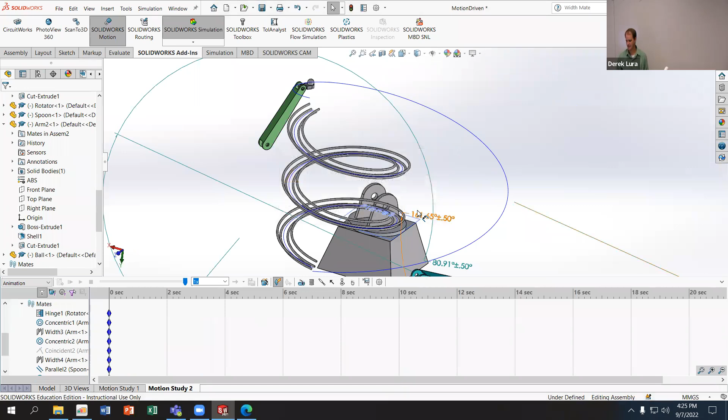Mine flew apart. Another thing you can do is that if you mess up your mates in your motion study, just make a new motion study. A lot of times that will help fix problems, because then you're starting off from a more from-scratch basis.

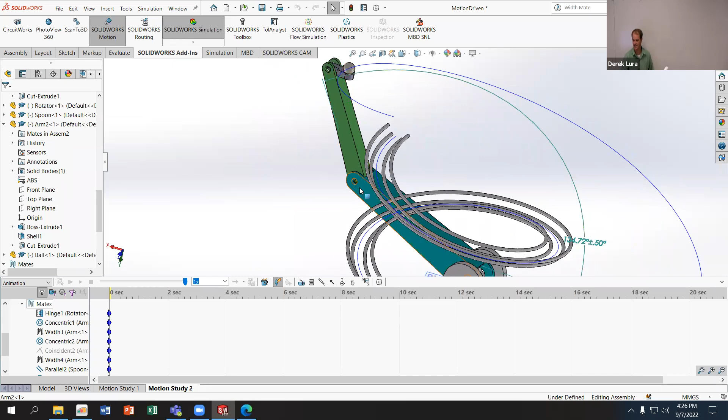I find that usually I've got to make a motion study a couple of times to get it to work the way I want it to, especially something like this where I have multiple configurations. Like somehow this got on the outside of the ball - I don't know how that happened, but it did.

And now fixing that inside the motion tool is hard. I don't want to do it. I want to get into a better starting position and then go through and fix it.

All right, so for your week 3 progress, I do want to see the assembly of the arm with the ball following the path. You should have at least one motor moving that assembly through one step - you can get credit for that. If you do want to go through and revise that part to make the arm drop the ball, spin around, catch it, spin back up, drop it again, you can set that up.

It's quite a bit of work - you may have to modify the parts, you need like a funnel at the top basically, or you might need a funnel at the top or the bottom to kind of hold it in place. Then you can do that for extra credit. I would suggest you don't do the extra credit portion until after you've finished your mini project.

But if you want to mess around with motion mates and stuff like that and get that to work, then good on you.